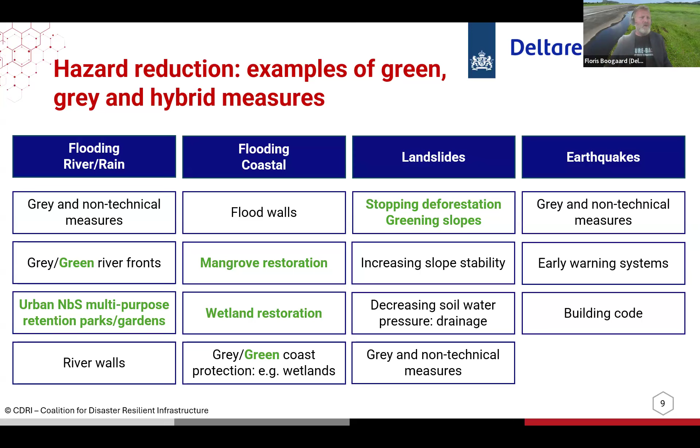So starting with that. But of course, now we're talking about implementations. So here are some things you can do already, nature-based solutions, specifically to a hazard, but most nature-based solutions are multifunctional. So they use a lot of resources and also provide a lot of benefits. So it's quite a complex situation, as you can see here, and I will show more examples.

Hans showed you some models on flooding, but for nature-based solutions, mostly it's also about heat modeling, or water quality monitoring. It's with different data that you can use, like INSAR data, if it's about subsidence. And so this is a long list of things that you can actually model - also maybe things you didn't think about. You could use social media for models, but also monitor water quality in very detail, mobility in your city, which can be a nuisance.

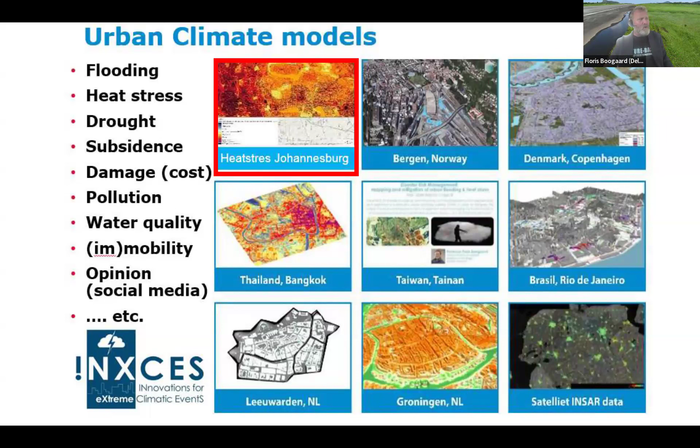Pollution could be water and also air. So a lot of nature-based solutions can be an answer to these challenges. This is a heat stress map of Johannesburg in Africa. You see that mostly in the urban dense area without green and blue, meaning water, you can have very high temperatures.

In the urban area it could be fatal, as you can see. One of the solutions, of course, there's not a lot of space, there's not a lot of budget in this case, and sometimes less capacity, is greening cities. That's a very important task in nature-based solutions, as I will show later.

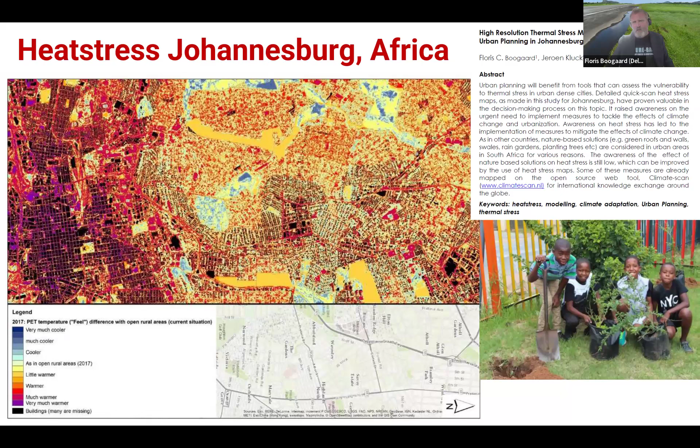So greening cities, I already said, this is sponge cities, maybe a park in Singapore in this case. What you can see is that it was lined, a concrete channel, because then the water flows very quickly. But of course, that can induce floodings as well, because there's a fast discharge.

And now a lot of these concrete channels, that's also about flood mitigation, as you can see, are now being meandered and taking place to a natural course. That's basically a nature-based solution. It's for biodiversity, but also about flood mitigation, because you can hold back the water and you have more room for the river, basically. So that's one of the nature-based solutions.

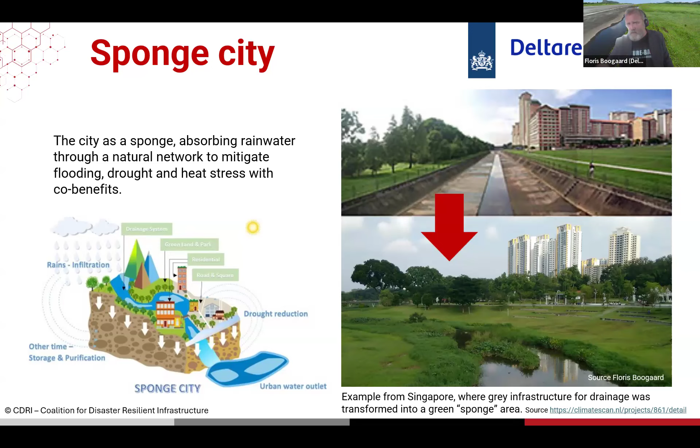But mostly it's also a combination of these two. You can have gray infrastructure and you can have green, and it's never totally green, it's never totally gray. Even in things like bioswales, there's a lot of drainage or gray infrastructure. So if we talk about flood walls, they're really gray, of course, to maybe greening cities, there's a whole spectrum in the middle. Sometimes then we talk about hybrid solutions, which is basically an assembly of gray and green, you could say.

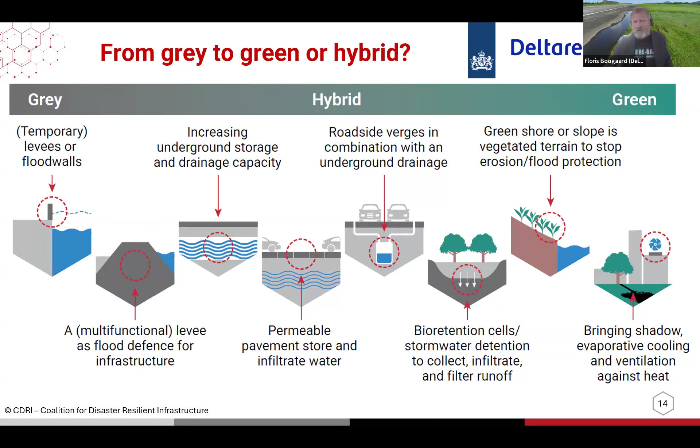And there's a lot of solutions, as you can see. There's also categorization in families, so that has mostly to do where you are. Depending on if you're a coastal city, you might have mangroves, wetlands, which you don't have high up in the hills, for example. So this starts with urban forest, which is more on the higher grounds.

And then terraces and slopes takes you down, and then you have more urban or rural situations where you have, for example, bioretention areas. And bioretention could be constructed wetlands, that could be rain gardens, that could be bioswales or swales without the nature-based element in it. So there's a lot of distinctions.

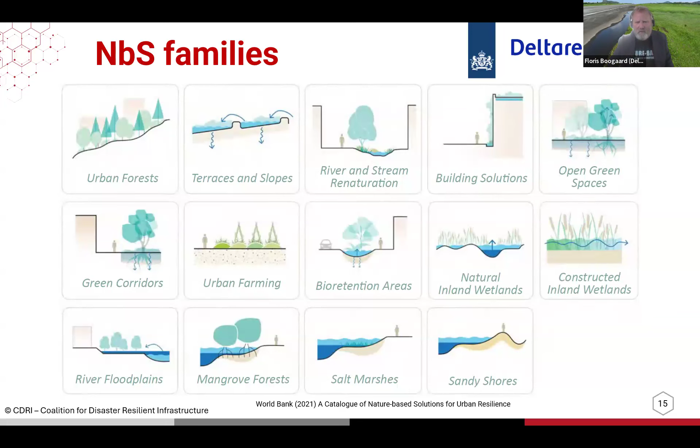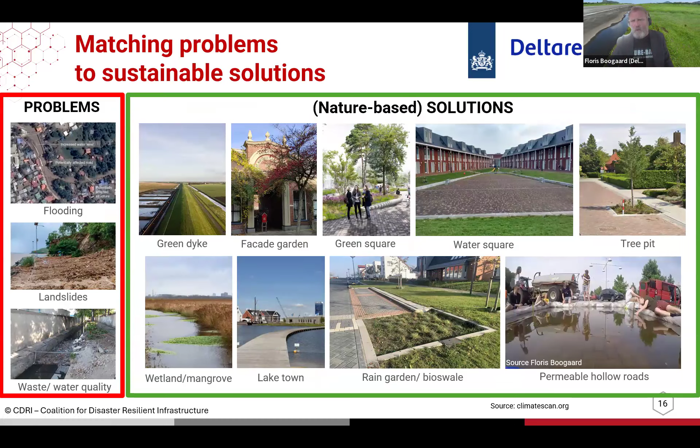So talking about families, as the World Bank did in 2021, might help. But most of the challenge is, of course, to see the challenge and see what kind of nature-based solutions would fit your situation. And that's where the second part of this presentation will be about, and also the tools that you can use.

So some takeaways from the first part. We've seen various hazards, that means various nature-based solutions, so to say. It's really about a cross-sectoral approach. So it's not about gray pipes anymore, it's also about greening and blue, and you need people from policy and also the maintenance. So it's really working together with a lot of organizations. The governance part is very important.

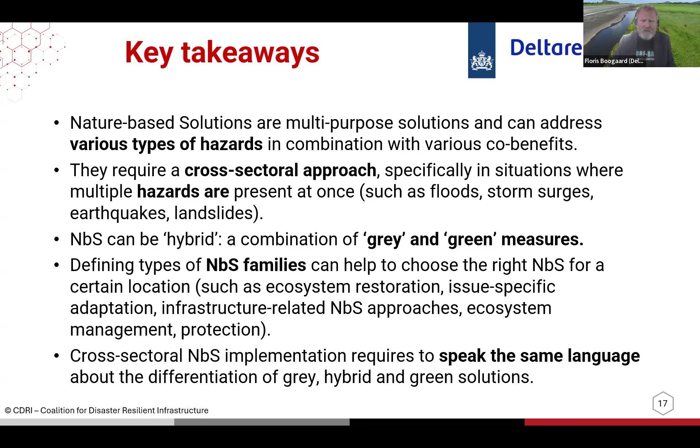We've seen it's not only nature-based, it's sometimes more grayish. And it really depends on the people or the definition that you sometimes have about nature-based solutions, also the measures. So speak the same language, I would say.

Then some examples. One of the examples, which is widely recognized, of course, is coastal greening, which exists in the form of wetlands, maybe, or mangroves. As you can see here, this is an example of Indonesia, and of course, you have to cherish this because it's very hard to make this your own.

Because in the world, a lot of nature-based solutions are already present, but they are being removed because we want to use that space or we don't like it. So if we then realize that we actually needed that for coastal protection, or we are more at risk, as you could see in the last presentation of Hans, then you start to plant mangroves.

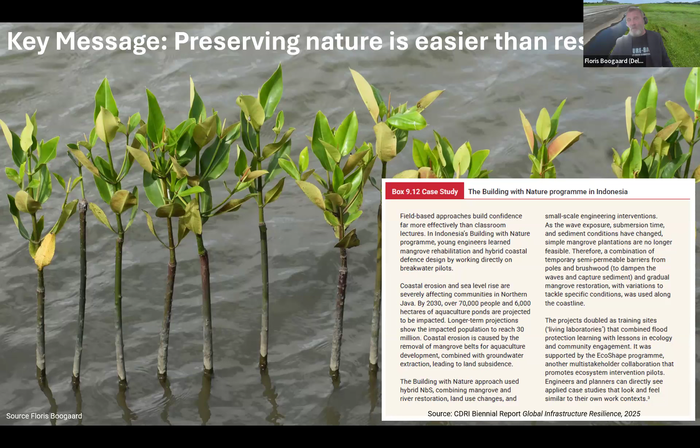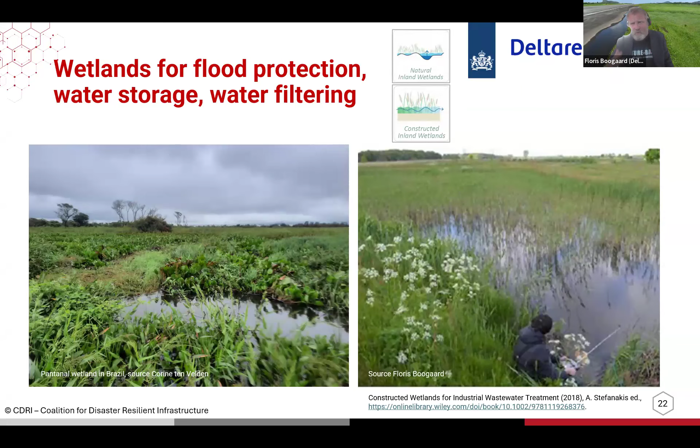And I can tell you, this is not easy. It's done all over the world, but it takes decades to find a nature-based solution that can protect you from coastal floodings, for example. So cherish what you have, because it's not easy to replant nature-based solutions. Also for wetlands, large parts of the world are protected by these natural assets, and you can make them stronger with some gray elements or nature elements.

Another example, West Africa. This is more where ports come into place. It's about sandbar breakwaters, also called sand engines. This happens in more places in the world, also in the Netherlands where I live. This is in Nigeria, for example, where sand is moved to make a stronger coastline, which can protect you during hazards. The red block is just one of the blocks in one of the documents I'll show later, where you can find over 100 case studies.

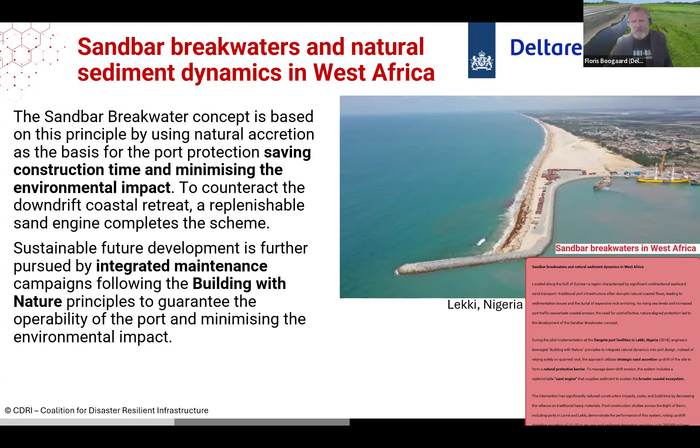So I'll show you where to find that. Those were large-scale nature-based solutions, but there's also a lot of small scale that could still be large.

This is a bioswale, for example. As you can see, it's quite large scale, but it could be a lot smaller too. This is really about water retention in urban areas, infiltrating into the groundwater. So basically it's a solution for both drought and flooding. The trees that align with the bioswale are more about heat, and you can see it's also used for recreation - people sit on a bench, or children play, and it's a lot more fun if there's water in it. So it has a multi-purpose area, which isn't very expensive or difficult - you just lower the grass instead of the gray, as you can see with a road and some houses here.

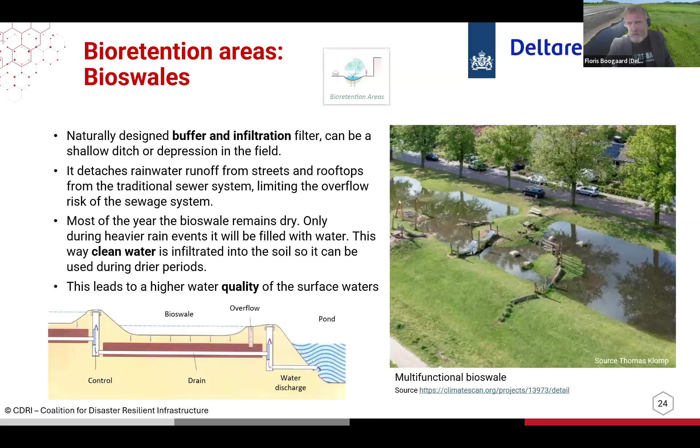Also, especially in a lot of countries, water quality problems arise, and this could be a purification method as well - basically a soil filter, with drainage underneath for clean water. These have been applied all over the world, in some cities more and more. These are some of the first rain gardens in Jakarta, for example, a city with a lot of subsidence, so you have to keep peat levels wet so they don't oxidize.

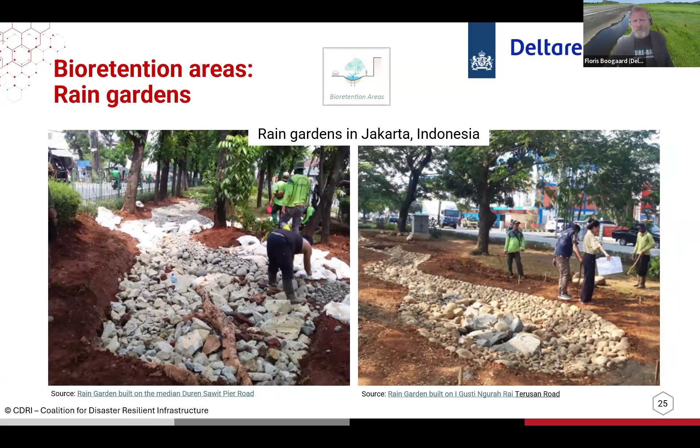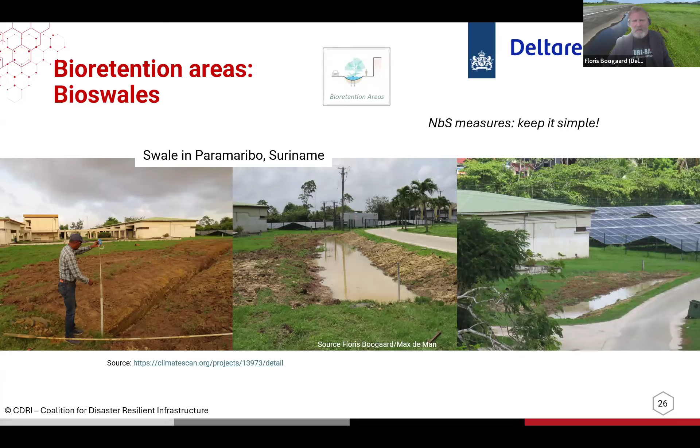This is the other side of the world - in Suriname, you see bioswales being made. The message here is that it's not very difficult - it's basically moving soil around. Of course there's a lot of science to it, but keep it simple would be my guess. And also share these examples.

This is from ClimateScan where you can find and put your own examples and a lot of data. This is one of the monitored bioswales in the world, which could be a nice example - it's nice to know the infiltration values, who was involved, what the governance is, how people like it. So there's a lot to talk about.

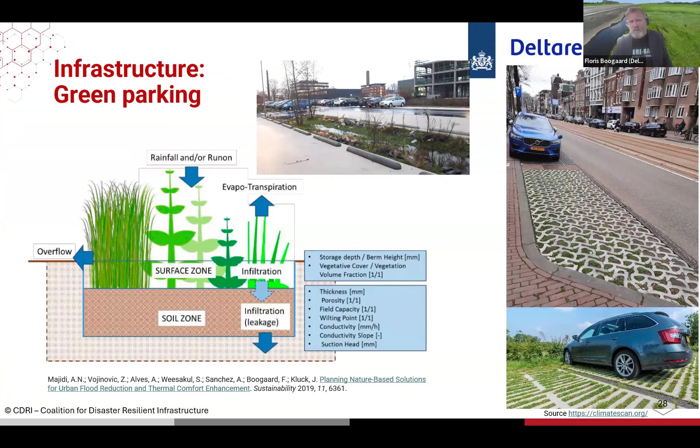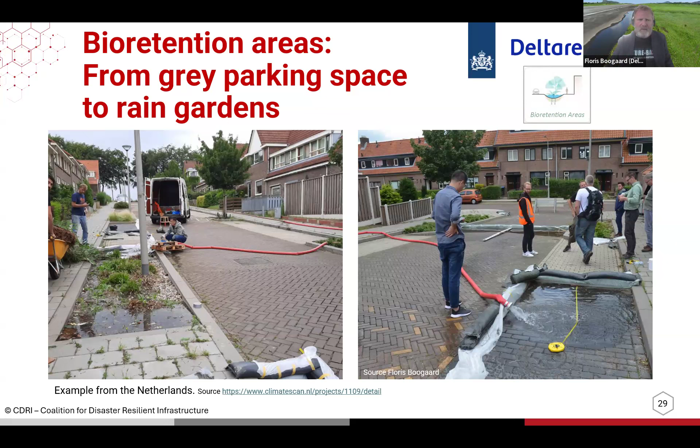Also, because it's mostly about infrastructure, you have in the city, of course, parking areas where you can find this biofiltration that looks like this. That could be totally green, so a rain garden or bioswale, but also permeable pavement is considered a nature-based solution - though that's really on the gray side. You have grass-filled pavers, a kind of nature permeable pavement, but as you can see, it could be totally pavement. These have a maintenance problem - they clog, so they need maintenance. If you don't have the budget for maintenance, maybe you shouldn't do these nature-based solutions, because they will clog and infiltrate less, maybe even the same as regular pavement, which in most cases is even cheaper.

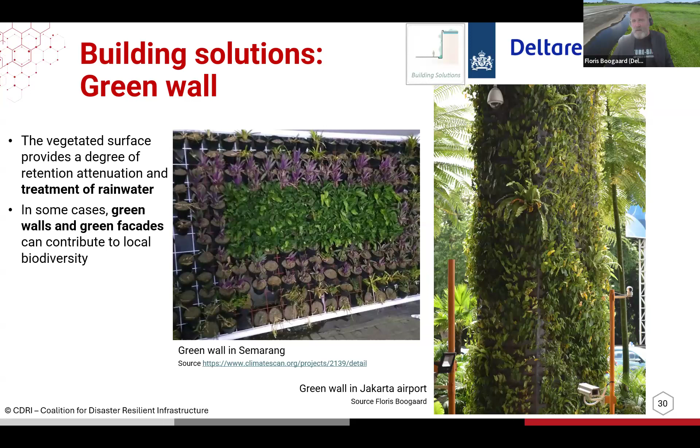Greening the city is about walls, as you can see here - walls can be found all over the place, and it looks very nice. Pillars are being greened - that's in Mexico, that's in Indonesia. You can find that all over the world, as in China, for example. Even flats, as you can see here - this apartment is the Bosco Verticale. Deliberately not a very nice picture.

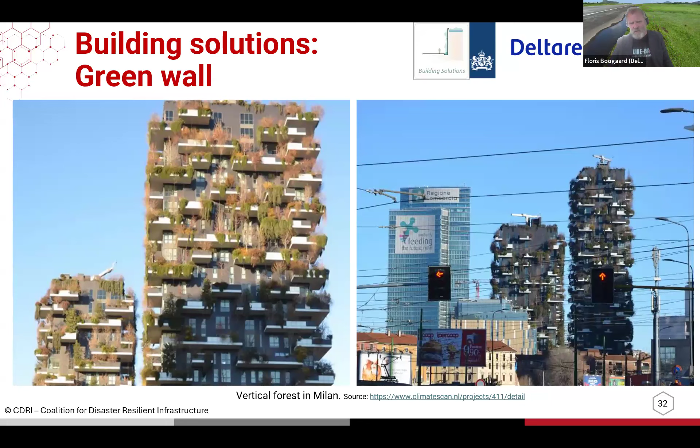This is more in drought, as you can see, because green also needs water, and sometimes you're in a dry situation. If that's your challenge, maybe you shouldn't do this too much, because a lot of drinking water is being used in this case.

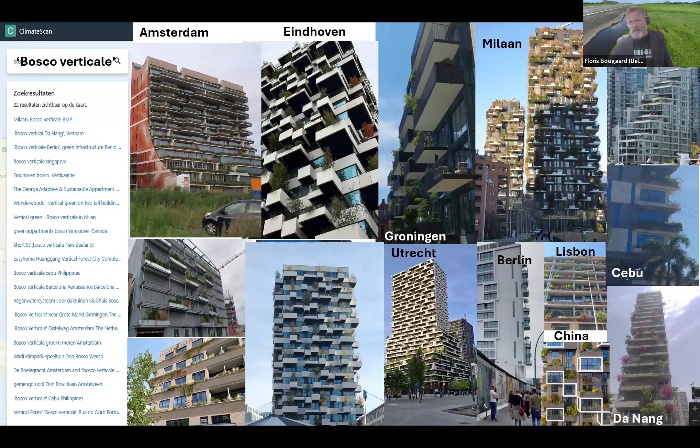No rainwater harvesting here. But the example of heat stress prevention, that's what it's about, and you can see it's taken up all over the world. You can see a lot of green forests, and it's lovely to see this.

It's really greening cities, literally, which is quite a difficult task. One of the key messages, because it's all very nice, but think about maintenance. As you can see, this guy here, a mountaineer, has to climb a lot to keep everything wet for irrigation, but also make sure that no trees will come and damage the sidewalks.

But these are very effective for heat stress, for example, and it could even be used for water quality improvement. So green roofs - you see a picture in the middle, one of my favorite green roofs in Africa. It's a grass roof, so it really is about the sponge cities. And of course, in Singapore, you can find a lot of knowledge about this. It's applied everywhere.

Some countries have more than others, like Norway, very in the north - it makes a lot of sense there. But it's about water storage, it's about urban heat, and there's a lot of recreation too.

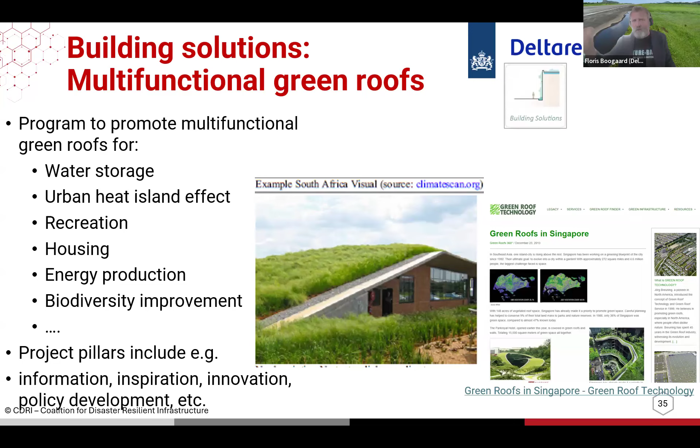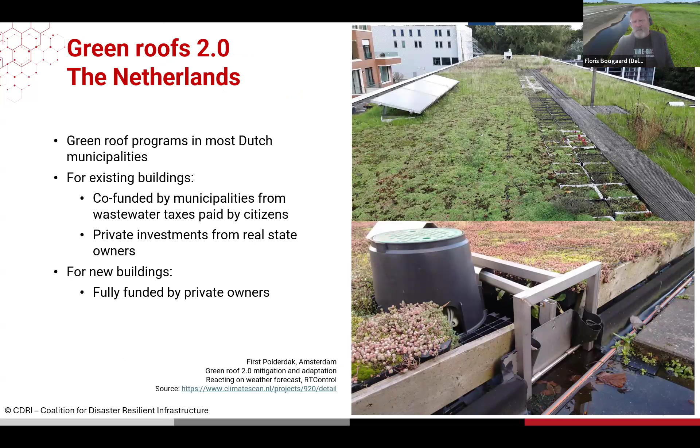You can be on the roofs, and you have also smart roofs that listen to the weather forecast, and if it's going to rain, they will discharge the water so it infiltrates to the ground, and then it can absorb more water. So there are a lot of types of blue roofs, green roofs - many types you can imagine. And you can find them all over the world.

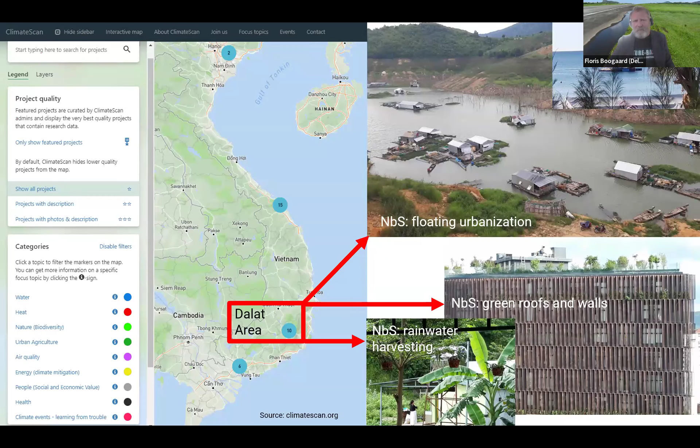Also green on roofs, which is not necessarily a green roof, but as you can see here in Vietnam, lovely things here - you already saw this picture. It's also about knowing how the water will rise and how you can keep your feet dry. Sometimes that's on poles - that might be amphibious housing, that could be floating houses.

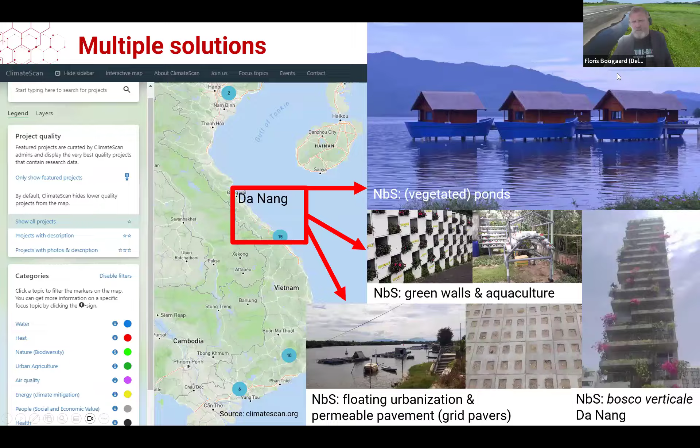Every city has a mixture of a lot of these measures that you can find. In every city - and this is a climate scan, you can go to your region, climatescan.org, and see what kind of nature-based solutions are out there. It's just an inventory of people that want to share their projects. This is Vietnam, for example, but you can find it everywhere.

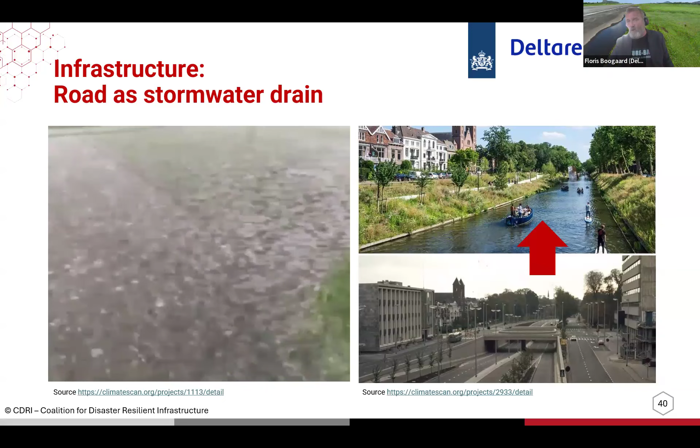Now opening canals could be a very nice nature-based solution to store the water again and discharge it if needed. Also roundabouts, talking about infrastructure - mostly they are not hollow, but you can make them hollow. There's a lot of water you can store - even underground subsurface storage of water.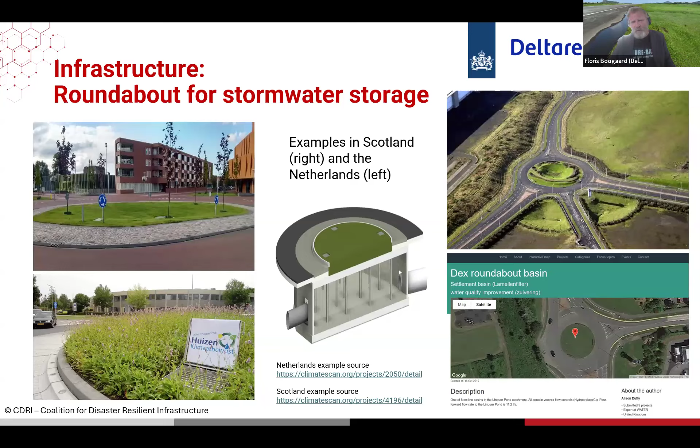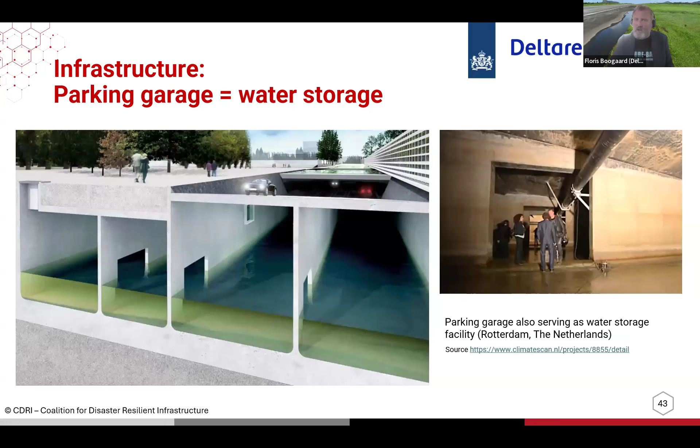So roundabouts could be nice, and even floating roads, as you can see here - that could be something we will see more in the future. And sometimes in the urban area you don't have a lot of space, but they go deeper underground and have a lot of storage in the underground section, or even the parking garage. As here in Rotterdam, it's 10,000 cubic meters of storage, and you can reuse it in the building as well. So that's something we can see more.

Some of the things that I see in my own environment - these are water squares, not very difficult either. It's squares - don't make them higher, so the water comes from the square to the houses, but make them lower, so it will retain water for a certain time, and you can discharge it or reuse it.

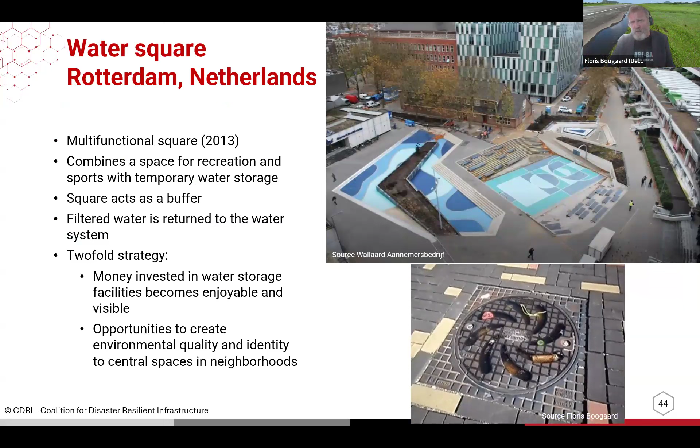So just a spectrum of a lot of nature-based solutions that I've shown you here in the urban case, coastal, and also rural.

So key takeaways: there's a large variety. If you see the long list on ClimateScan or other tools, there are more than 100 types of nature-based solutions that you can choose from. There's innovating - it could be innovating for one country, or conventional nature-based solutions in another.

Different types have, of course, different costs, also different benefits. We'll explore that a bit more in the next session. And NBS can be in every scale, so large mangroves and wetlands to very small, maybe parking spaces. So there's a wide spectrum of what you can do.

Implementation of NBS is quite important, very difficult sometimes as well. So we try to make it simple. A simple approach is analyzing the flood and then setting an ambition. That could be a certain amount of rainfall that you want to store or reuse, or a hazard that you want to prevent with a certain occurrence.

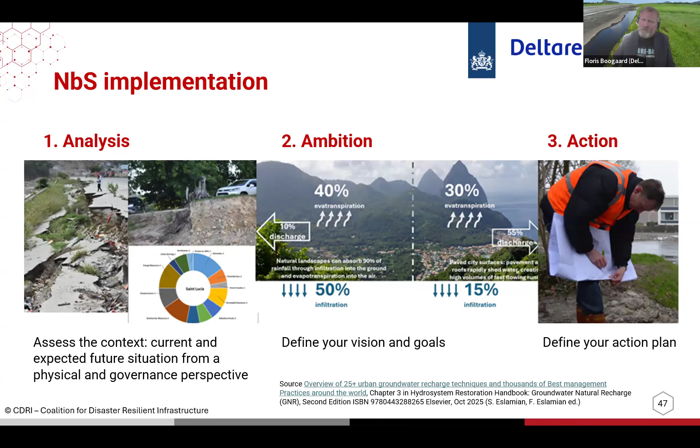And of course, it's about action. You don't have to do that necessarily in that order. You could also see if a nature-based solution would fit and learn from it. So there's a cycle that you can go around. But still, analyzing - those are the models that we talked about for flooding.

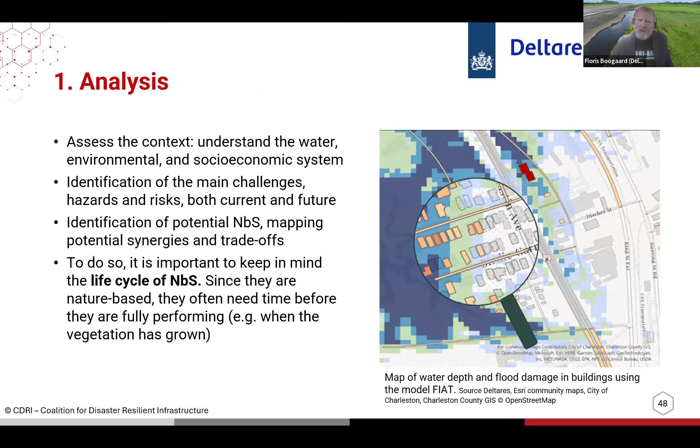We'll not explore it more, but you can imagine that depending on your challenge, it could be water quality or heat stress or different challenges - you need different models and different approaches, as you can see from the examples I showed in Johannesburg and also in Mali.

So the ambition is something you have to do together with organizations that are affected by the hazards. That could be municipalities, residents of the area, the higher government, of course. Also, water flows over countries, so it could be international. It really depends on where you want to be setting your ambitions.

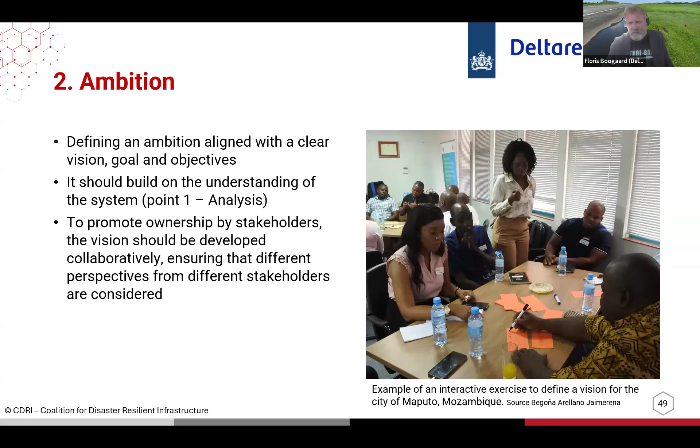And ambitions aren't only about 60 millimeters on flooding - it's also about heat. How much trees do you actually want, or what is your quality? What are the concentrations you allow for BOD or other concentrations you're worried about? So it's quite a complex situation, of course.

And you have a lot of tools to see what kind of nature-based solutions fit. Here's a table with a lot of examples that you can use on the map and make those ambitions practical.

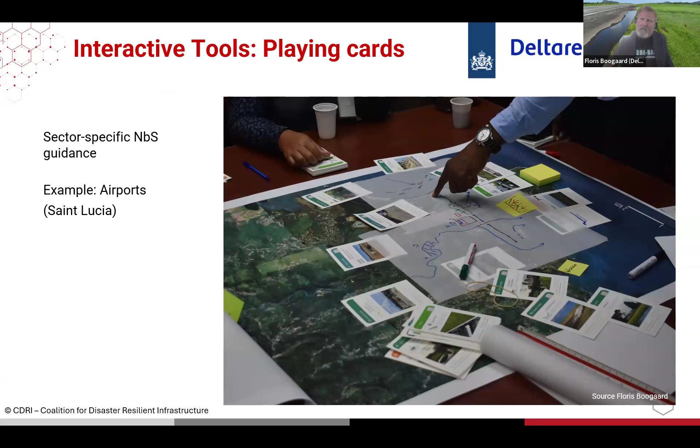And if you see something work - because you flood it, one of my hobbies, I flooded a lot of bioswales and permeable pavement - sometimes it doesn't work, and that's very instructive. If you see a lot of people from municipalities and water authorities, and you see that the water doesn't disappear or infiltrate, maybe you shouldn't choose that nature-based solution.

You better choose one first, try it out, and if it doesn't work, change it, optimize it, because there's also a reason for it. Try to figure out which nature-based solution of the long list of 100 would fit your situation.

Cost is a very difficult topic, but also always a question - how much does it cost? It's very difficult to ballpark, but for example 16 euros 45 cents for the connected area to a bioswale. You can see that some nature-based solutions that only use earthwork, like a bioswale, are cheaper than maybe constructed wetlands that need more pipes or even pumps.

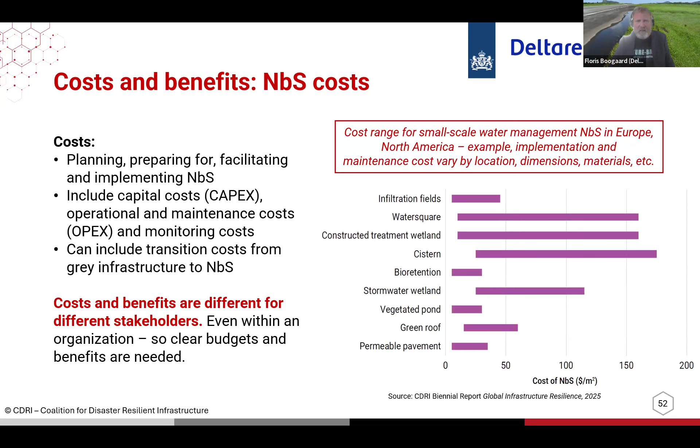So you can choose your nature-based solutions according to your budget, so to say. Most important is not only the cost - mostly, if you have a hazard, there's more cost to clean everything up. So it's good to make an investment.

Also see what the co-benefits are. Co-benefits are, of course, reducing the hazard - less heat stress, less flooding, etc. But maybe also community cohesion. A lot of nature-based solutions are sometimes about urban farming, so it's also about food. It's about people working together. It's about air quality - it's about more than only these.

And these are very hard to put in numbers. That's why it's here - yes, it really depends on the situation, of course. But know that there's a long list of nature-based solutions, also a long list of benefits, and especially nature itself.

Of course, you can see the butterflies, maybe or the bees, as an indication that we're doing our work right. So for this section, keep it simple.

I know I also say it's complex and large to choose from, but analyze: what information is available, what is lacking, find an ambition, where are you satisfied. Also, it's adaptation - you cannot rule the world, you should adapt to a certain situation. Maybe accept that there might be water or a bit heat in some regions because you don't have the budget or the space or the capacity to do it.

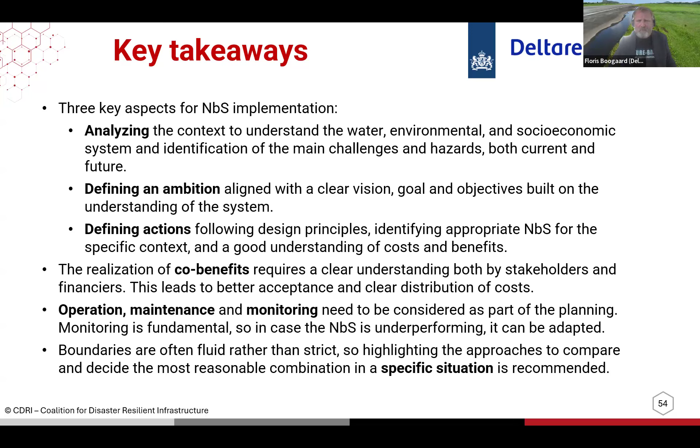So, every situation is different. So that's already tapping into challenges. We want to give an honest story and not only show beautiful pictures on how it looks.

As gray infrastructure, as in your situation now, everything needs maintenance. The problem is new, sometimes we don't know what to do. Sometimes we think we don't have the budget, but basically choosing for green and gray, it doesn't have to cost more. You could face your challenges maybe even with more benefits and even less cost, but it's a different approach.

So you need to teach people. You need to reserve budget and capacity and work together, of course, with green, blue, and the policy, and also all the organizations involved. So the governance is quite important here.

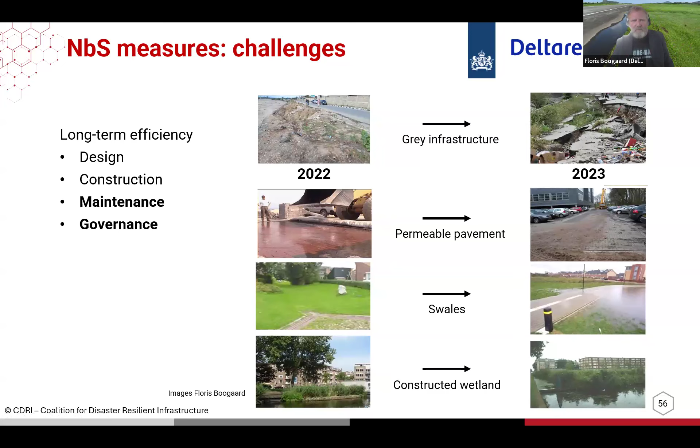You see some nature-based solutions that are quite old and might have some challenge in the future. Maladaptation takes place as well. I can say as a researcher that I'm really proud of a lot of nature-based solutions and a lot of benefits they have, and people that are very satisfied with it. But of course, there could be effects that you don't count on.

That could be if you infiltrate stormwater - most people think wastewater is not clean and rainwater is very clean, but of course there's also heavy metals involved, and those could be going to your deeper layers. That could be maladaptation. So think about your situation and see if there's any possible effects because of maybe poor design, but also lack of maintenance - it's good to think about it.

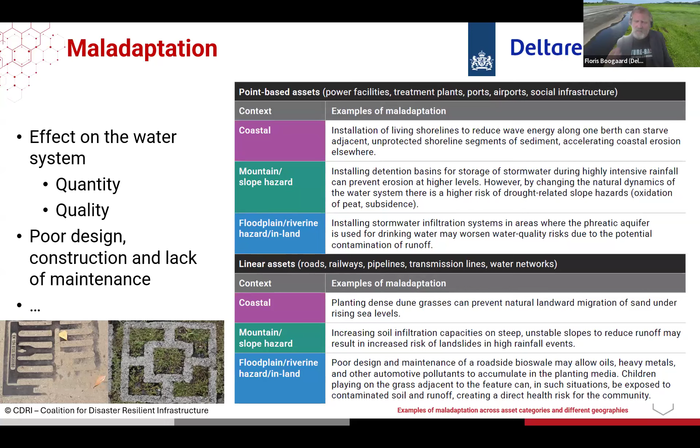So just a bit of a warning in the sense of being an honest story - a lot of the situations, it goes quite well, but in other locations there might be effects, and that's also in the MOOC and the report. Know that it's not like a gray pipe that stays always the same.

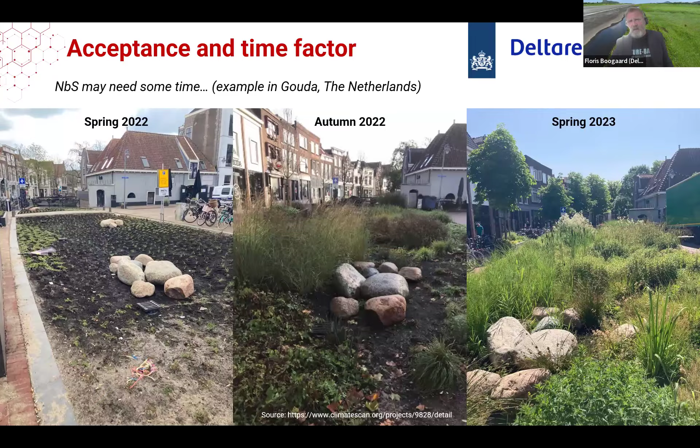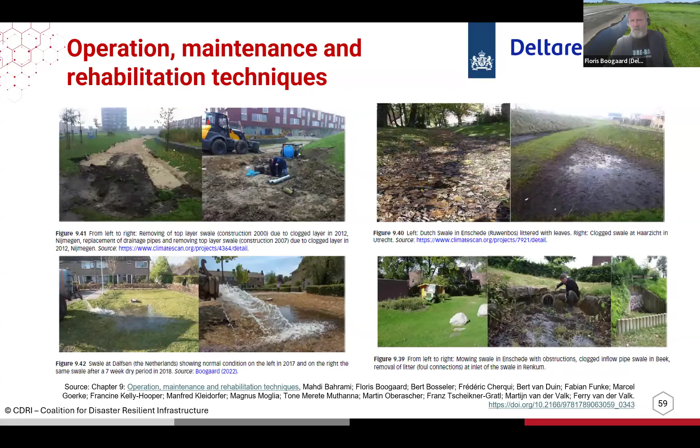You have to know rehabilitation techniques - there's a lot of information about it as well. It's just a small percentage of places that go wrong or situations that go wrong, but think about it. And of course, monitoring itself.

I told you already, one of my hobbies is testing these bioswales and seeing if the water actually disappears. And you see more people than me there. So this is actually a very small ClimateCafé, but a lot of people come out and see what is useful.

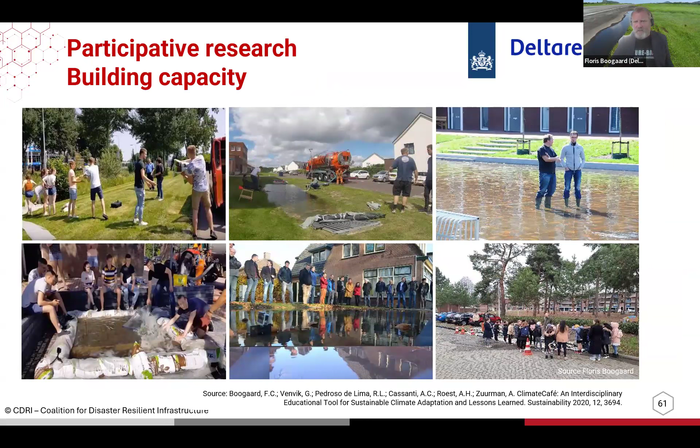And of course, also new colleagues that you need to involve - education instead of research. You see a lot of students in these floodings, etc. That could be useful. Maintenance - a lot of information about it.

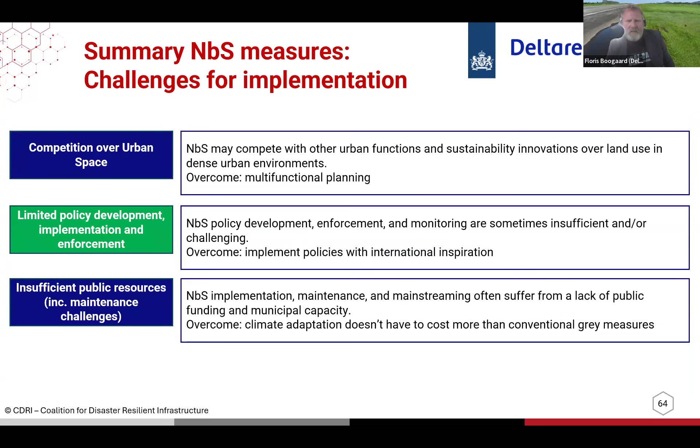I promise you some of the literature that you can use, and so there's a lot of information there. And of course, the challenges - different challenges are being addressed, and also some of the success or advice that you can use with this NbS and what kind of NbS you could choose. And also there's guidance and the Green Action Roadmap, because it depends on what kind of information or organization you are and where you stand.

So next part is case studies, but Raina, you want to come in - am I too late, or... maybe in another 3 or 4 minutes. So then we have some time for the interaction as well. Thank you. Absolutely, rounding up. Yeah, sure.

So I promised you case studies. I already showed a lot, so I could be very quick. In the report and also the MOOC, there are case studies from all around the world, available a lot in the Global South. Some of the maps are already mentioned, but there are over 1,000 case studies selected where you can find them.

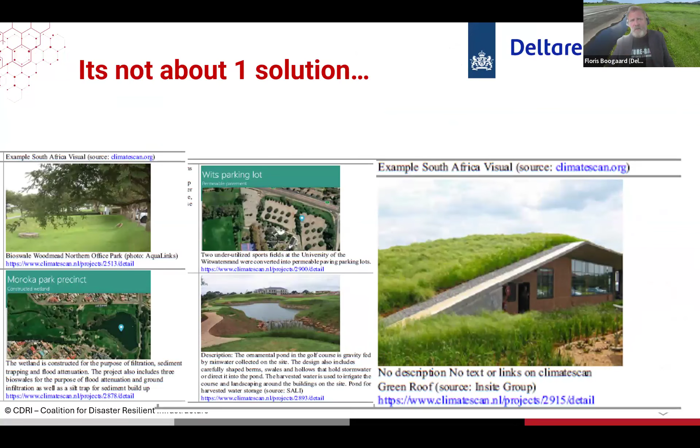It's not about one solution, as I say. So the green roof again that I love - this is only in Johannesburg. Know that every city is different. Johannesburg has a lot to do with water demand. Also Cape Town, of course, with day zero. We can learn a lot from it.

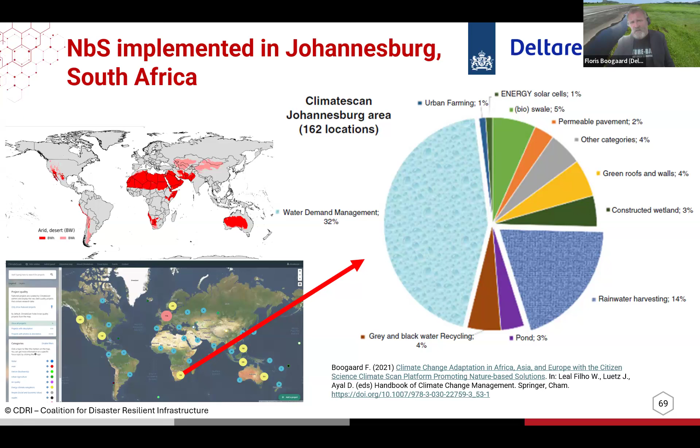This analysis, what you can see here about water demand, is mostly about sharing your good examples from around the world. This is the map you can use and go to your specific situation and share your knowledge, because every city is basically different, as you can see here. You could compare Johannesburg with Rotterdam or St. Lucia or Malmö or those things.

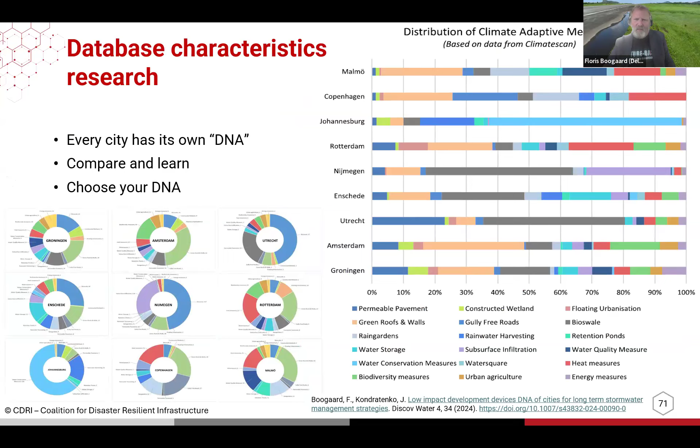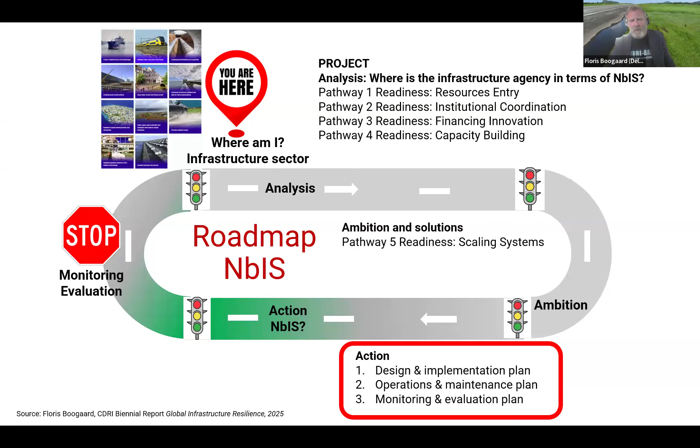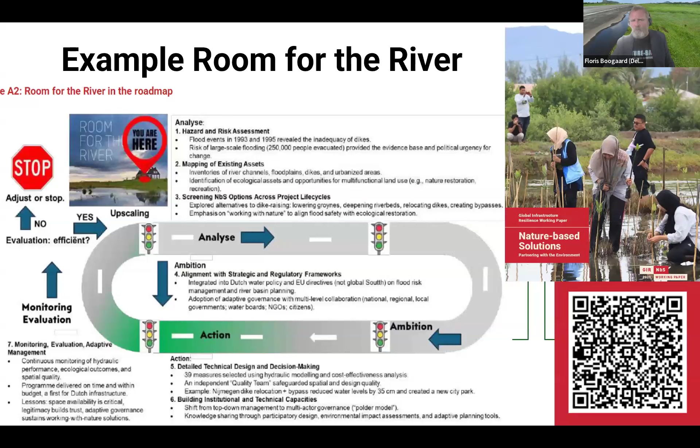Room for the River is one of the programs being used all around the world. It's quite logical - make room for the river. These are the different questions and answers to those questions that you could use, and this is all in a report. You see the QR code here about nature-based solutions if you haven't seen it yet. It could be very useful for further reading, I would say.

And the last slide is the conclusion. I just hope that you found more understanding of nature-based solutions, also speak the same language, definitions that you saw - that it's a really broad spectrum. There are over 100 in the enclosure of the report, you can see the whole list. Cost and benefits, brushed on that - very important topic, of course, a key aspect for implementation.

We tell a very honest story. It's not going right, as in gray infrastructure, but you have to take care of it. A lot of case studies to choose from, and of course a roadmap to see how you are standing or what you need. But that will be the discussion in the last minutes of this seminar, I would say. So thank you so much, and I will stop sharing.